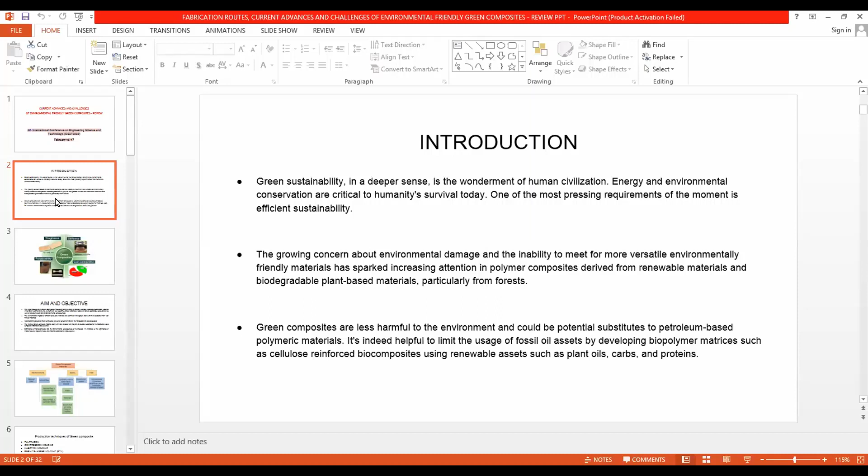To render them affordable, sustainable and eco-friendly, many studies have suggested developing biodegradable green composites utilizing renewable resources such as natural fibers, agro feedstocks and biodegradable polymers. As you can see on your screen, these are the wonderful properties: very good toughness, high stiffness, easy processability. It is even cost competitive when compared to traditionally used composite materials based on metal matrix composites.

So what is the aim and objective? I think this portion I have already covered. When you say green composites, this is how they are divided: reinforcement, matrix, and filler. Based on this classification, the reinforcement is classified into natural fiber and hybrid fiber, and we have natural fiber plus natural fiber, and natural fiber plus synthetic fiber.

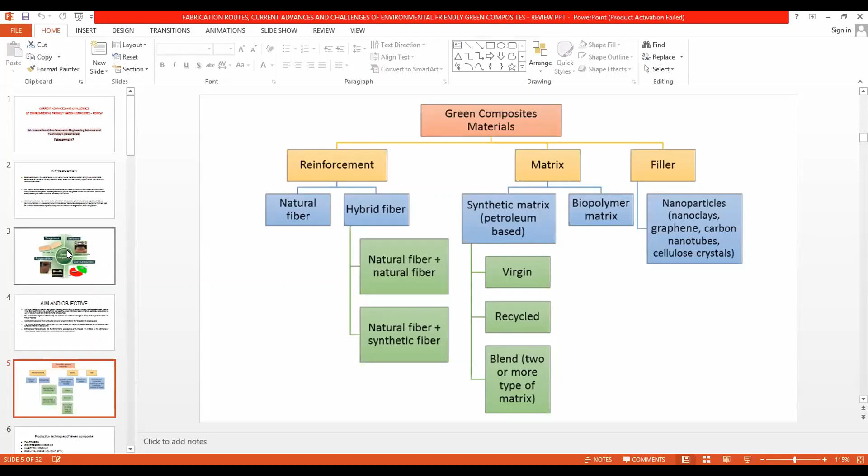In the case of the matrix, we have the synthetic matrix and the biopolymer matrix. Among the synthetic matrix or petroleum-based materials, you have virgin, recycled, and blended. Coming to the last one, the filler part, we have nanoparticles: nanoclays, graphene, carbon nanotubes, and cellulose crystals.

Coming to the various production techniques adopted for the manufacture of green composites, you have important techniques like pultrusion, compression molding, injection molding, resin transfer molding, extrusion, thermoforming, and filament winding.

In green composites manufacturing, green composites have indeed been designed to establish composites that are very environmentally beneficial. Most are either entirely biodegradable or moderately biodegradable materials. Recent advances in the production of entirely biodegradable green composites, such as starch and wood fiber composites, as well as soy protein-based composite materials with organic fibers, have shown tremendous qualities.

This is how the sustainable reinforcement fillers can be identified. You have flax, sisal, wood pulp. In the other portion, you have wheat, corn, miscanthus, which come under agro and forestry residues. In the case of traditional natural fibers, we have kenaf, flax, jute, sisal, ramie, cotton, bamboo, henequen, and wood.

Of course, industrial products are also widely used as reinforcement materials, like lignin, DDGS, biocarbon, and pomace. Pomace is actually a product of the oil that comes from the olive. I think most Middle East countries are much more familiar with pomace. This is another residue that comes out; it is an industrial co-product that can be used as a reinforcement.

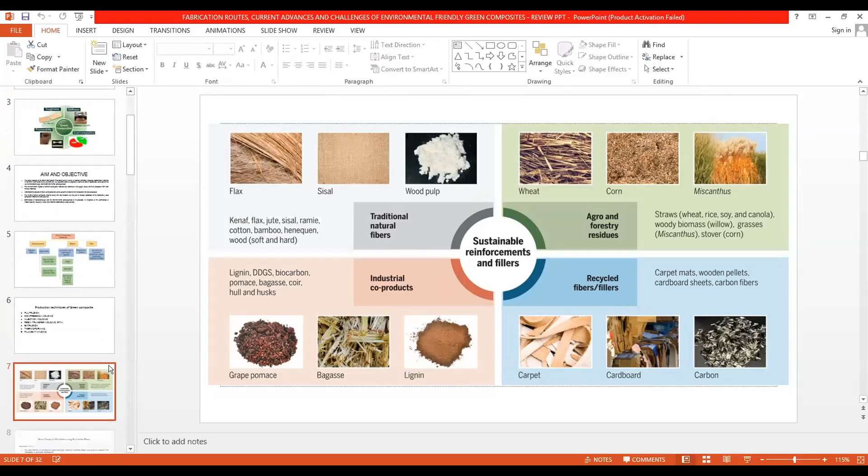In the other portion, you have recycled fibers like carpet, cardboard, and carbon, such as carpet mats, wooden pellets, cardboard sheets, and carbon fibers. These are all very common applications that you can see. So when it comes to the natural fibers, see what I'm trying to give.

What we have done in this particular review paper is we are trying to throw some light on the importance of green composites by introducing what are the different types of fibers that are used, and then we have moved to the other aspect of how green composite is going to replace the metal matrix composite genre, and not only that, how well the green composite is going to be an environmentally friendly material when compared to the other non-biodegradable materials.

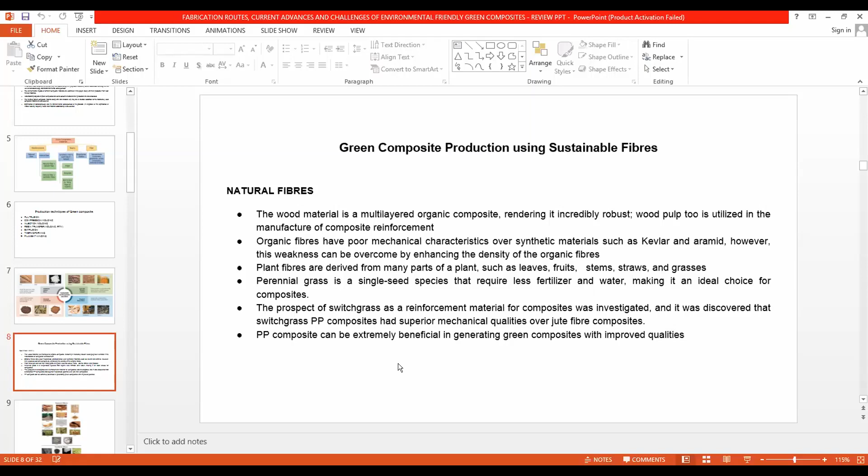So when it comes to natural fibers, of course, the wood material is a multi-layered organic composite, rendering it incredibly robust. Even the wood pulp is utilized in the manufacture of the composite reinforcement. The other common organic fibers, we know that although they have poor mechanical characteristics over synthetic materials such as Kevlar and aramid, this weakness can be overcome by enhancing the density of the organic fibers.

So when you say organic fibers, they have some tremendous advantages over the synthetic fibers, including recyclability. They have very good biocompatibility, environmental friendliness, superior insulating characteristics, and reduced machinery wear. And the natural fibers may be able to replace the synthetic fibers in the near future, provided their moisture absorbing characteristic is lowered, and the fiber lengths are extended to improve the mechanical characteristics.

When it comes to the plant fibers, we know even residues like the leaves, the fruits, stems, straws, and grasses are all studied in detail by numerous researchers. And natural fibers, on the other hand, have several drawbacks when compared to synthetic fibers, such as product variance owing to factors such as the plant age, the climatic and geographical growth circumstances, the cultivation techniques, and the cleansing technologies. So all these things we have to consider while manufacturing the green composites, right?

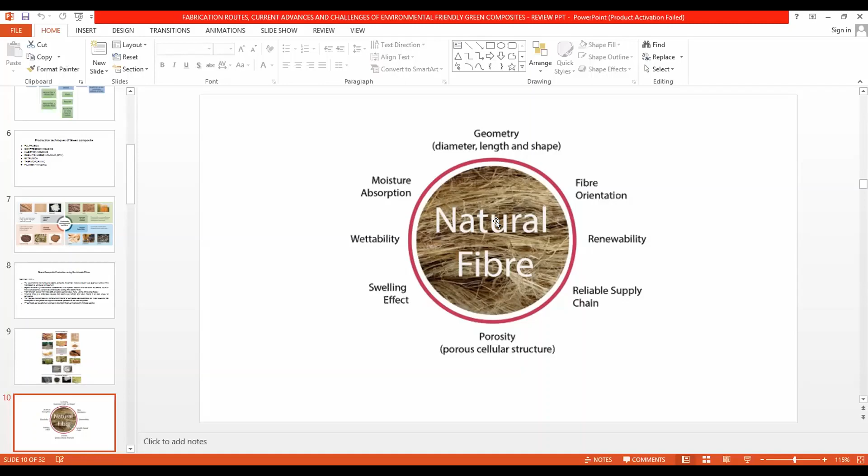Of course, these are some of the factors that must be considered before this natural fiber is used as a viable replacement for the synthetic fibers. So you have the moisture absorption, fiber orientation, renewability, reliable supply chain, the porosity, the swelling effect, even the wettability are some of the features that we have to look into. So this is the natural fiber.

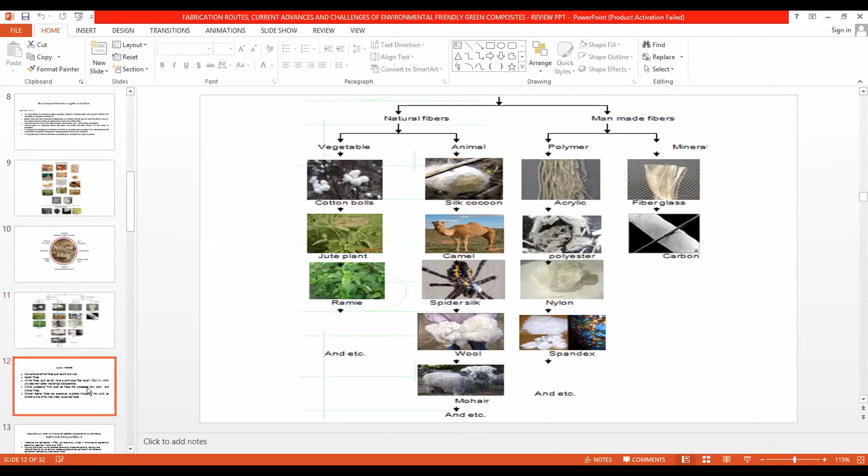Already we have covered the man-made fibers and the natural fibers: the cotton boll, jute plant, ramie. When it comes to the animal part, we have the silk cocoon, the camel, the spider silk, wool, and mohair. And coming to the man-made fibers, the polymer and mineral, you have fiberglass, carbon, acrylic, polyester, nylon, spandex. Okay, and these are the animal fibers which we have already covered. For example, chicken feather fibers are extensively available throughout the world, as chicken is one of the most widely consumed foods.

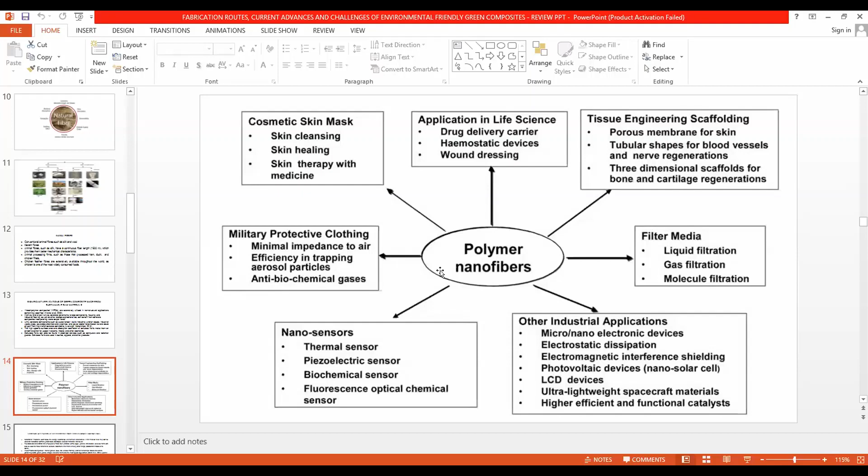Coming to the application part, that is something that we have to give some importance. Let me come to the applications, and I will come back to this. So these are some of the very important applications of polymer nanofibers. For example, they're used for cosmetic skin masks, applications in life science, drug delivery carriers, hemostatic devices, wound dressing. Of course, tissue engineering and scaffolding, porous membranes for skin, tubular shapes for blood vessels, and nerve regeneration. And other industrial applications such as micro/nano electronic devices and electrostatic dissipation. So all these are some very important applications of the polymer nanofibers.

So coming to the significant applications of the green composite made from sustainable raw materials, that is, you have the nanofibrils, in medicine, cosmetics, energy, electronics, environment, and textiles. In the medical field, they can be used as medication carriers, for prostheses, bandages, surgical materials, and so on. So these are some of the facts, because I've been given a very short time, although in the review paper we have covered many important aspects related to the significant applications of green composites.

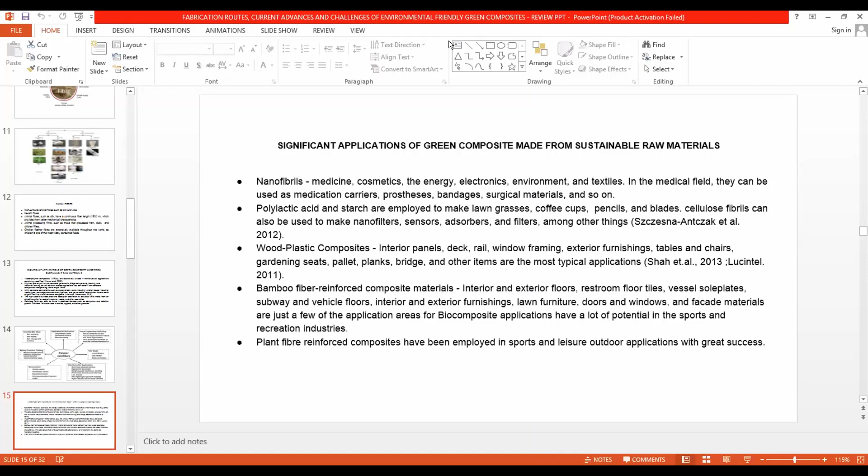The other applications are the plant fiber-based reinforced composites, like boat hulls, canoes, skateboards, surfboards, bicycle frames, sports rackets, dolls, music equipment. These are some of the important applications of the green composite made from sustainable raw materials. So what about the recyclable ones? Recyclable material, indigenous resources, construction and materials reclamation are also included in green composites, in architectural as well as structural applications. And green composite bars have been very commonly used in construction to substitute conventional steel bars, resulting in structures that are significantly earthquake resistant.

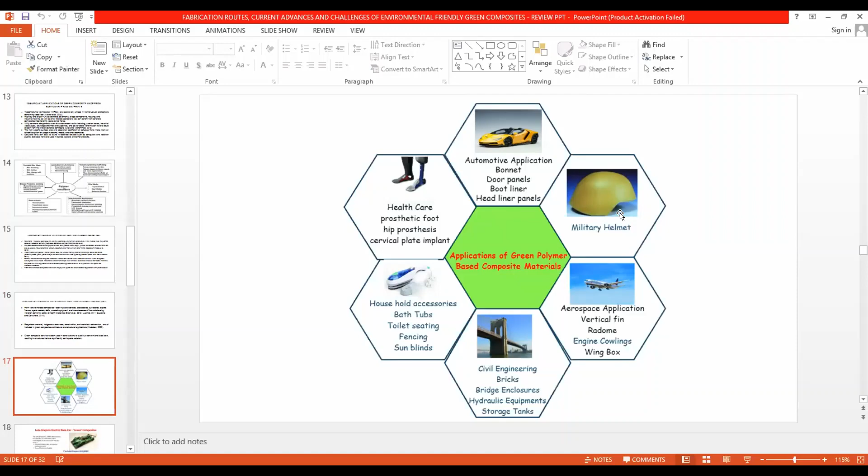These are some of the most common applications, which I think we are already aware of. The most common one is healthcare: the prosthetic foot, hip prosthesis, and cervical plate implant are very significant applications of green polymer-based composite materials. And the automotive applications, the bonnet, door panels, boot liner, headliner panels, and even a military helmet are other significant applications of green polymer-based composite materials.

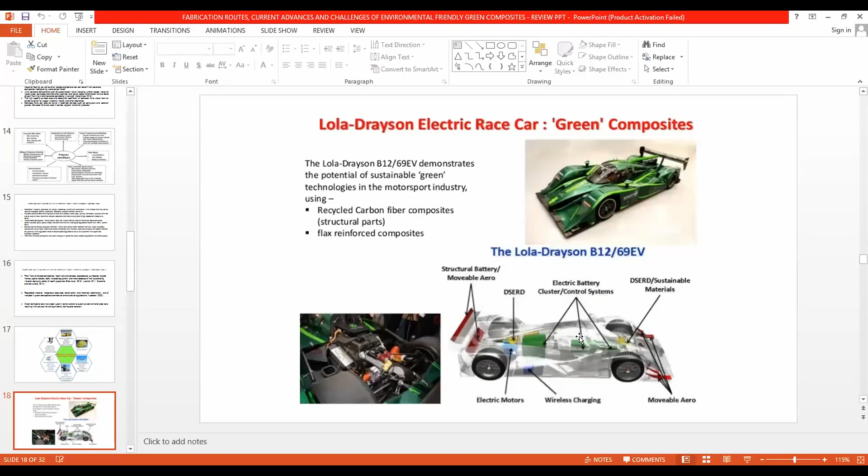And this also, I think most of us are already aware, the Lola-Drayson electric race car is also made of green composite. In other words, recycled carbon fiber composites are used for the structural parts. Even flax reinforced composites are used to manufacture this particular sports car. Even the Lola-Drayson, the B12/69EV, is another significant area where green composites are used. So these are some of the other applications you can see on your screen.

So what about the concerns in the production of green composites? So far, we have seen the advantages, but there are some concerns that we have to face. The very first thing is the heat treatment issue. Heat treatment is no doubt a major stumbling block in the way of the smooth manufacturing of green composite materials, because the fundamental issue in green composite manufacture is that they must survive extreme heat while removing the odor produced by natural fibers such as kenaf, hemp and jute.

The natural fiber-based composites are quite expensive, which is not acceptable to the massive car sectors. Another drawback is the insufficient knowledge about the functioning of sustainable and green composites, owing to an enormous diversity of ingredients, which is the greatest hurdle to surmount in this industry. One more thing is, to achieve good quality composites, the first essential task is to choose the correct manufacturing circumstances and factors, as well as the precise choice of composite ingredients and overall material qualities.

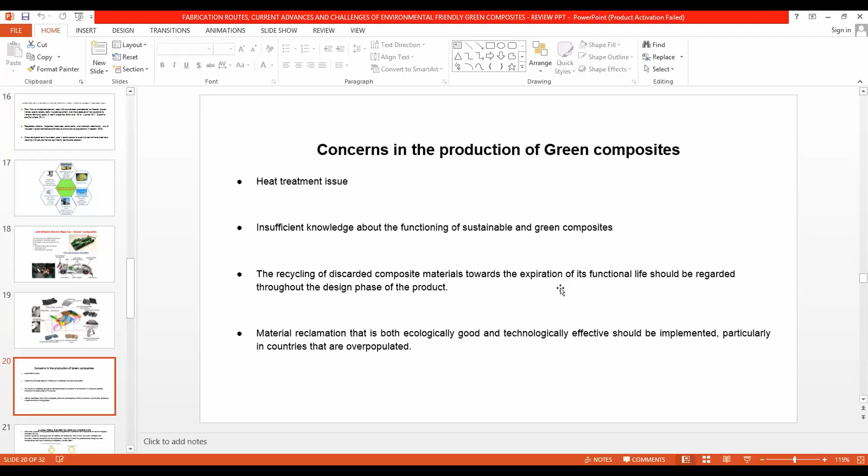And plastics are somewhat inevitable materials in many aspects of modern civilization, including medical services, distribution of food, construction materials, automobiles, mobility, and even the wrapping for household devices. So material reclamation is another factor that has to be considered. That which is both ecologically good and technically effective should be implemented, particularly in overpopulated countries like India, China and Indonesia, where population is a major thing.

And one more thing I want to cover is, sir, can I cover for another 3-4 minutes, sir? Can I talk for another 3 minutes?

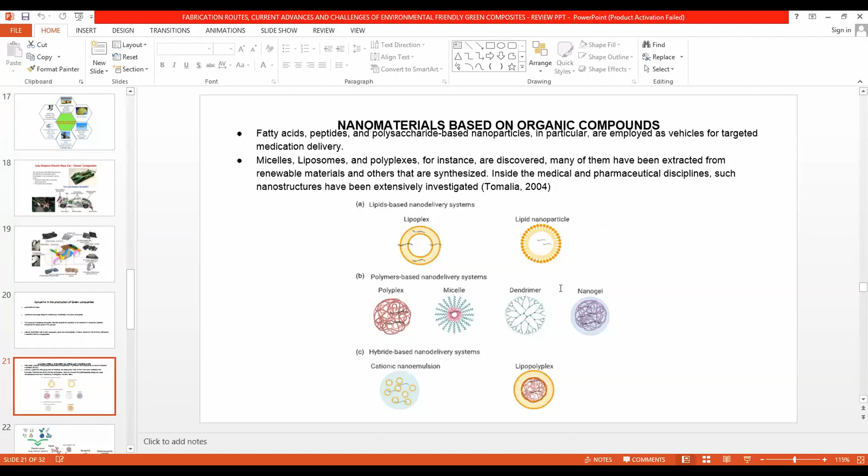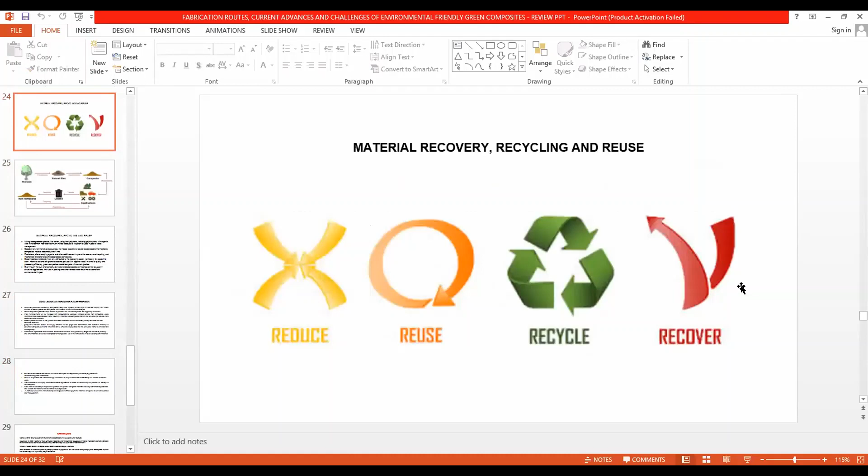You can end. I can end, or can I proceed, sir? Okay, sir. So some of the slides I thought of covering, but because of the time limitation, okay, sir.

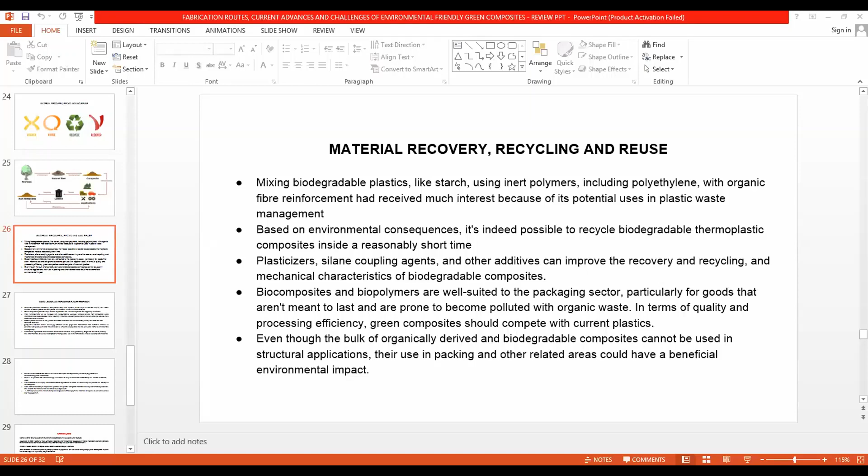And there is also one more presentation I would like to do, on the effect of fabrication parameters on the mechanical, wear and corrosion behavior of hybrid metal matrix composites. Recycling of MMC, a review. Can I make the second presentation, sir?

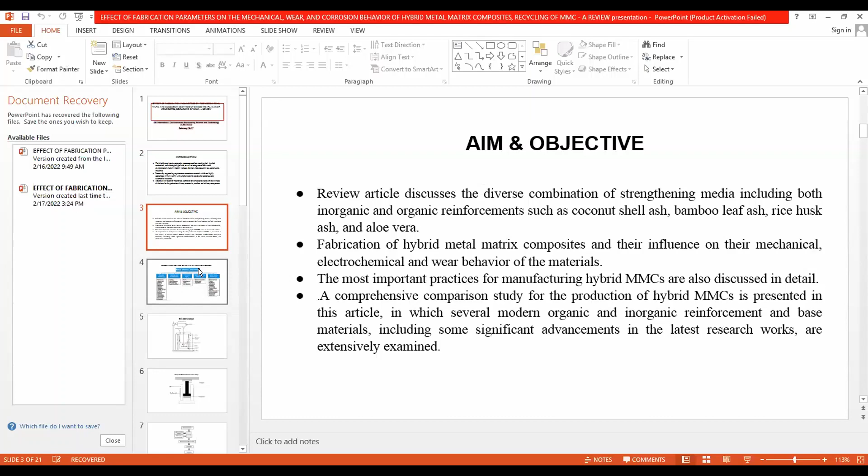The other fabrication methods that are carried out will also be covered. A comprehensive comparison study for production of MMCs is also present in this article, in which several modern organic and inorganic reinforcements and base materials, including significant advancements in the latest research works, are extensively examined. So this is the very basic outline of the classification of the various production methods followed to produce metal matrix composites.

Of course, the most common is powder metallurgy: mechanical alloying, sintering, mixing, blending of powder and hot pressing, spark plasma sintering, deformation processing of powder compacts. You have melting and solidification, thermal spray like plasma spray, cold spraying, electrochemical deposition, and the latest novel techniques like molecular level mixing, sputtering, sandwich processing, vapor deposition, mixing as paste, and nanoscale dispersion. These are some of the most commonly adopted manufacturing routes.

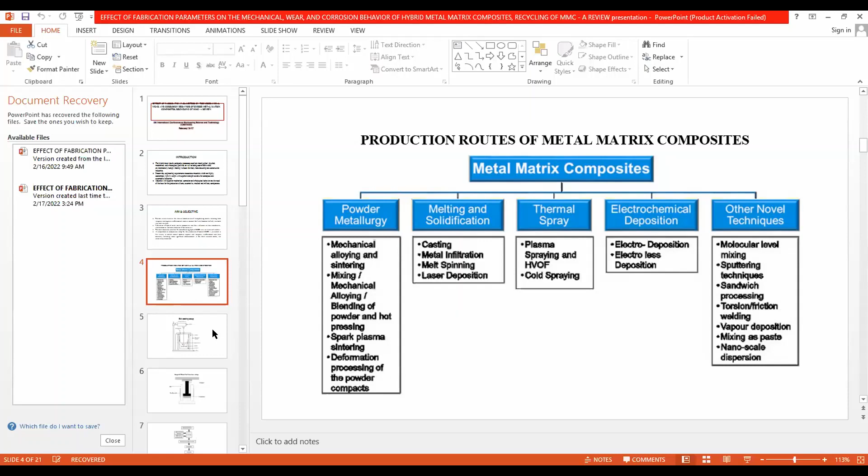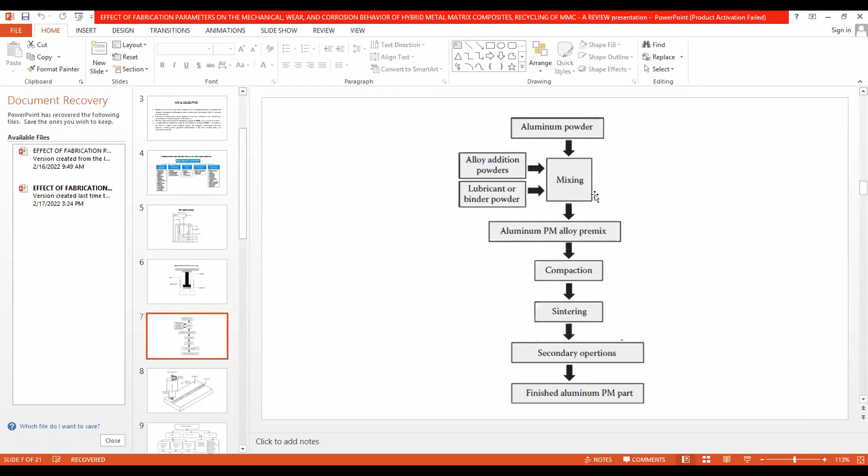Another very important thing is the type of reinforcement used. You have alumina, silicon carbide, boron carbide, titanium carbide, tantalum carbide. In other words, combinations of oxides, borides, and carbides are generally used as synthetic reinforcements to improve the strength and other properties like tribological and corrosion properties of metal matrix composites. The most commonly used synthetic reinforcements are magnesium oxide, zirconium silicate, zirconium oxide, titanium boride, silicon carbide, and boron carbide.

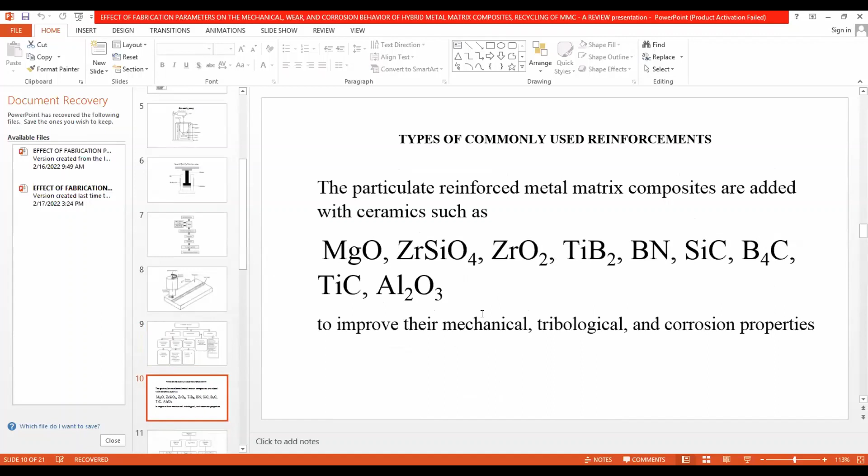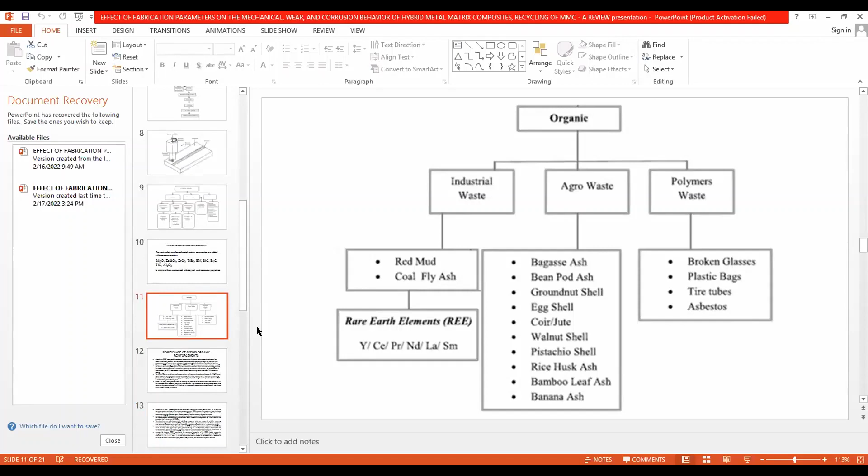So what about organic reinforcements? How are they classified? Industrial waste, agro waste, and polymer waste. Under industrial waste, the most common are red mud and coal fly ash. Many research works have been carried out reinforcing the metal matrix with organic reinforcements: how the mechanical, corrosion, and wear behavior are affected. It was found really satisfactory that organic reinforcement could be a very good replacement for synthetic reinforcements. These are some of the research works carried out.

For example, Al-Sadi et al. investigated the mechanical characteristics of polyester matrix composite with microscale natural pistachio shell. Pistachio means the commonly used pista. That shell material is used for enhancing properties like flexural strength, tensile strength, and impact strength. And even hybrid egg shells are also used.

Even the BLA is another important reinforcement that has been used along with alumina, and studies have revealed that the tensile strength, yield strength, and specific strength have also been improved because of the addition of the organic reinforcements. We have many research works; only a few I have shown in my presentation.

So you have the rice husk ash. Even rice husks have been included in the 6061 aluminum alloy, which acted as a nucleation source, resulting in finer aluminum matrix grains, and even wear resistance, in addition to increased mechanical characteristics, has been achieved.

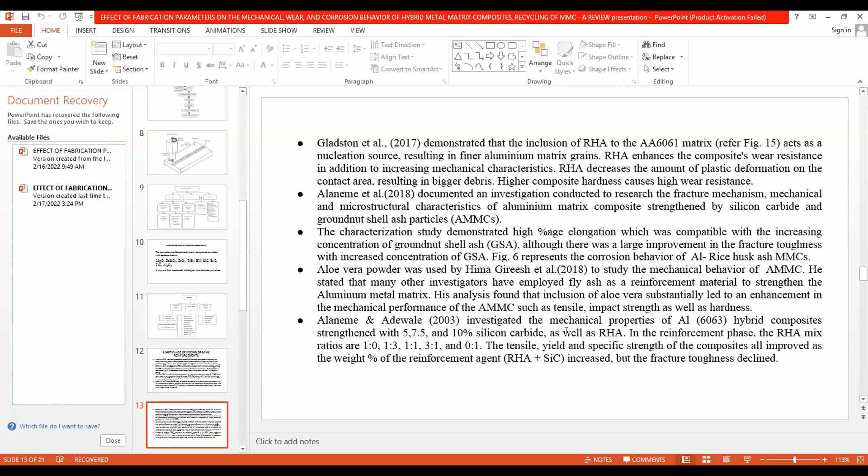Even aloe vera powder has been used to study the mechanical behavior of aluminum metal matrix composites by Hima Gireesh. And again, Alaneme and Adewale in 2003 investigated the mechanical properties of 6063 hybrid composites strengthened with 5, 7.5 and 10% of silicon carbide. Significant improvements in tensile, yield, and specific strengths have been observed.

So what about the recycling aspect? Recycling is a very important topic because the ever increasing number of agricultural and industrial waste products raises environmental pollution problems; it poses the risk of poisoning in people and animals and also plant contamination. Furthermore, irrespective of area, global consumption levels have already had a substantial influence on the environment.

So recycling is a process of removing goods from the trash stream so that they could be utilized as raw materials in the development of innovative products. The result of recycling can be two: one, the recyclables could be used directly, or the waste products can be employed as raw materials for new items.

So these are some of the research works. P.S. Ling and M. Gupta investigated the possibility of recycling a silicon carbide particle reinforced aluminum composite, and it was found that there has been a significant improvement in the ultimate tensile strength. Even the ductility and other mechanical properties were found to be significantly increased.

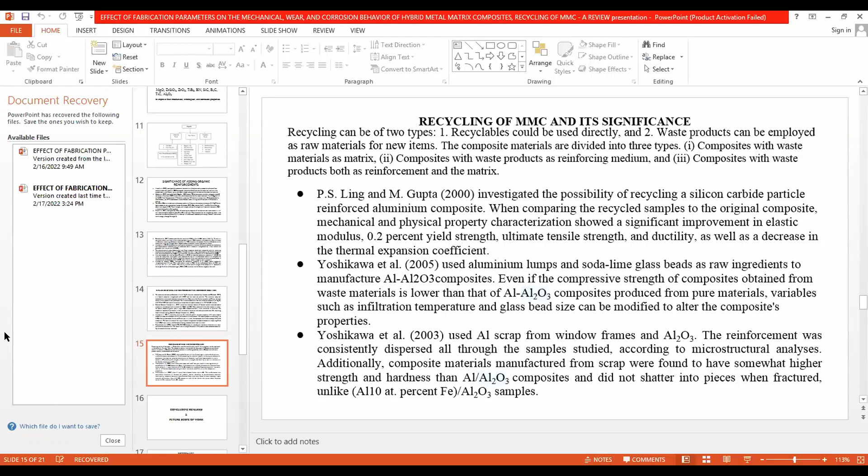And what about the future scope? Let me add a few words: the present review paper suggests that hybrid metal matrix composites based on nano and biomaterials are evolving sectors that can be effectively used in automobiles, maritime, aviation, and wind electricity production.

And hybrid thermoplastic and hybrid structural composite materials can also be used in civil engineering, biomedical engineering, as well as other affiliate industries, despite significant work in this domain. So more such research can be carried out, and hybrid metal matrix composites can still be implemented in areas where we can focus on nano-based hybrid metal matrix composites.

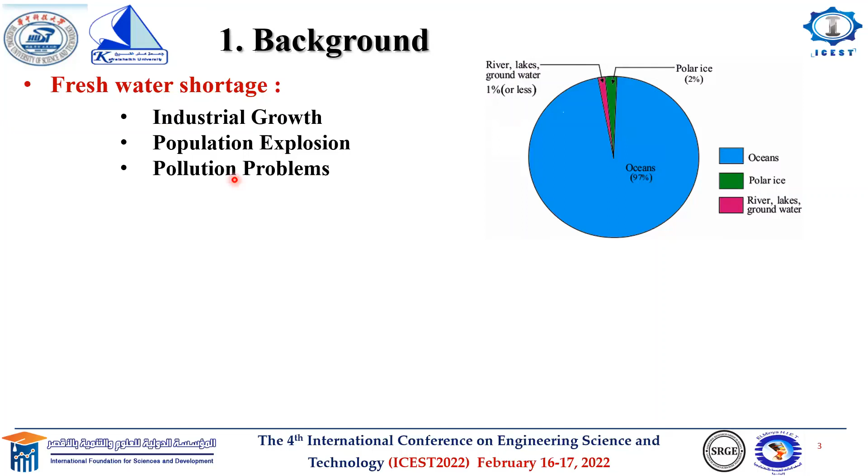First is the background. I think all of us are aware of the problem of freshwater shortage, as only 1% of the water is drinkable. This problem is increasing with the industrial growth, population explosion, and pollution problems. But the Earth is very lucky because of the availability of solar energy. The solar energy is available approximately on all the Earth's surface, with daily energy about 7.4 kilowatt per meter square per hour.

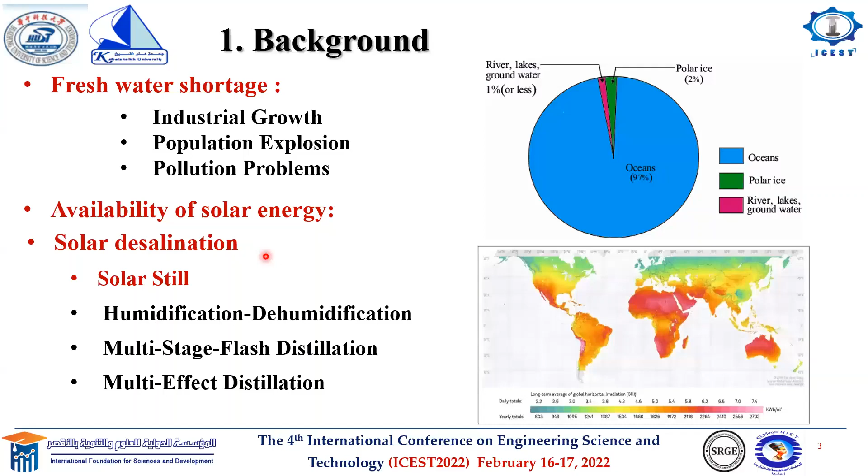This is a great opportunity for solar desalination systems, especially the solar still. A solar still is a simple device that consists of a basin which contains saline water that evaporates under the solar radiation. Then it's transferred to the inner surface of the glass cover to be condensed and is collected as fresh water. The solar still has many advantages such as simplicity, easy operation, and low cost, but it has disadvantages of low productivity and low efficiency. So many efforts have been conducted to enhance the productivity and efficiency.

To enhance the productivity and efficiency, we should know what are the parameters affecting the performance of the solar still. According to a machine learning work, it was proved that the thermal design is the most important parameter that affects the performance of the solar still. So approximately all the efforts conducted to enhance the solar still performance were conducted to enhance the thermal design.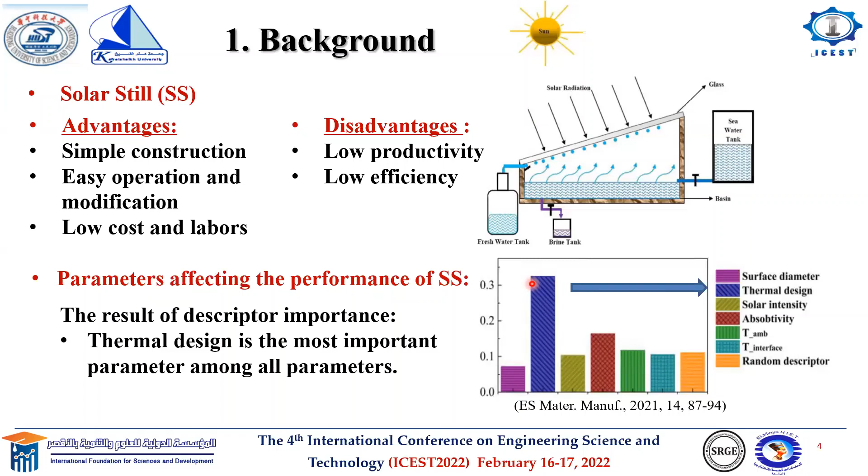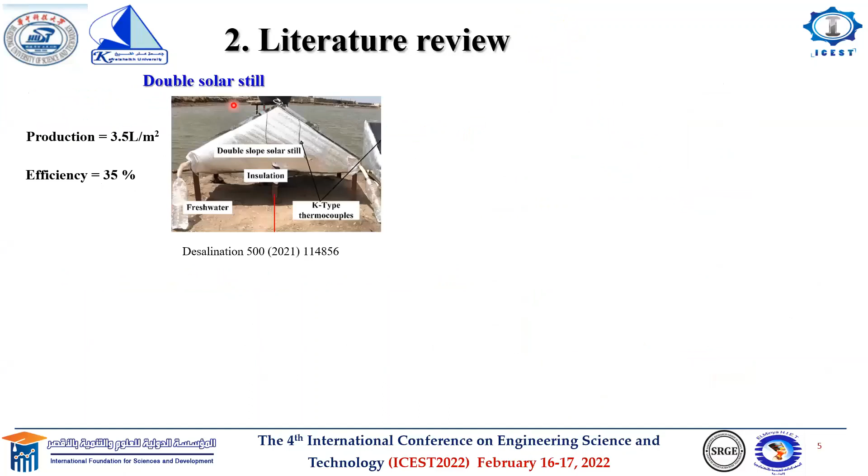Now I will give a literature review. There are many designs of solar still. This design, which was presented as single slope, was updated to double slope solar still, pyramid solar still, hemispherical solar still, and tubular solar still. We can see from these numbers that enhancing the thermal design can enhance the productivity and the efficiency, but it's still low. So further enhancement can be conducted, such as integrating heat localization material.

The aim of heat localization material is to localize or concentrate the heat on the surface of evaporation without the need to heat bulk water. In this work, a plastic ball was used as insulation. It was covered with wick to have good capillarity to raise the water to the evaporation surface. The productivity and efficiency were enhanced by 60% and 32% respectively.

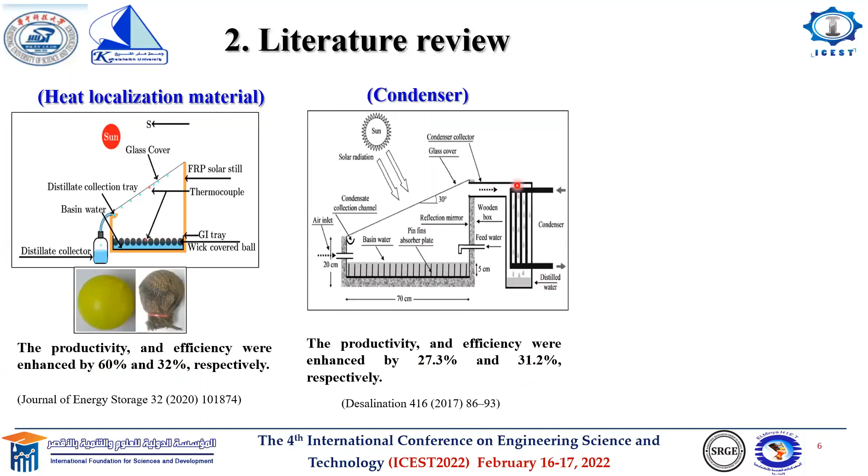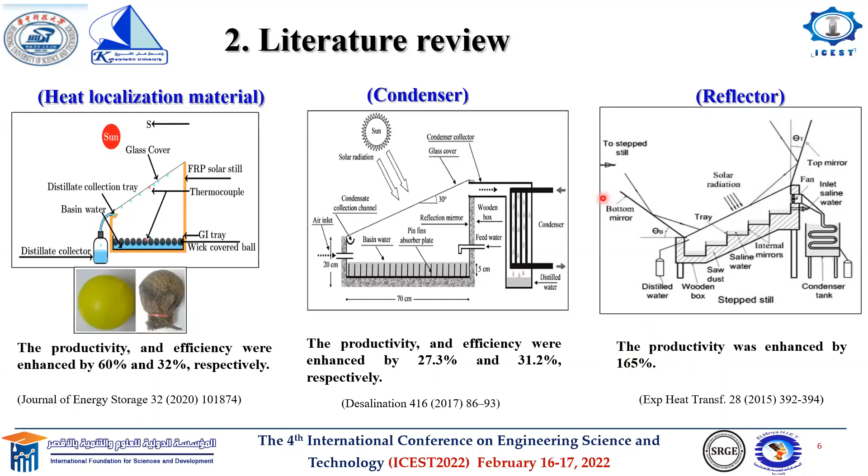Also, the performance can be enhanced using a condenser. The condenser aims to increase the condensation rate of the vapor. In this, the condenser can enhance the productivity and efficiency by about 27.3% and 31.2% respectively. Besides, reflectors can be added to concentrate the solar radiation on the evaporation surface to enhance the productivity. In this work, the productivity was enhanced by more than 165%.

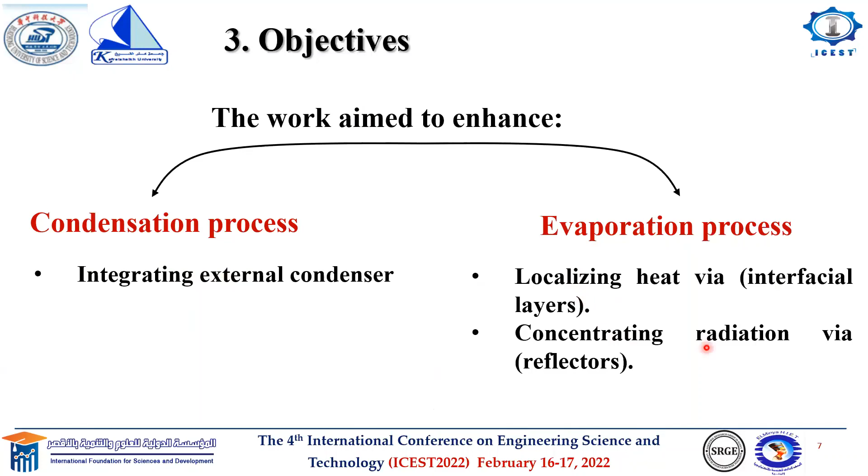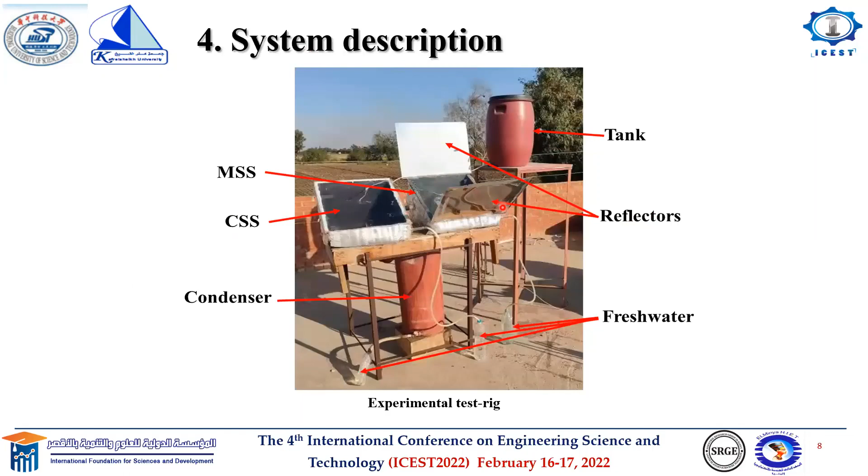The objectives of the current work are to enhance the condensation process using an integrated external condenser, enhance the evaporation process using heat localization material or interfacial layers, and concentrate the radiation via reflectors. Our system consisted of a conventional solar still for comparison and the modified solar still. The modified solar still was integrated with reflectors, an external condenser, and heat localization material. The whole system was provided with saline water through a tank and connected with pipes, fittings, valves, and others.

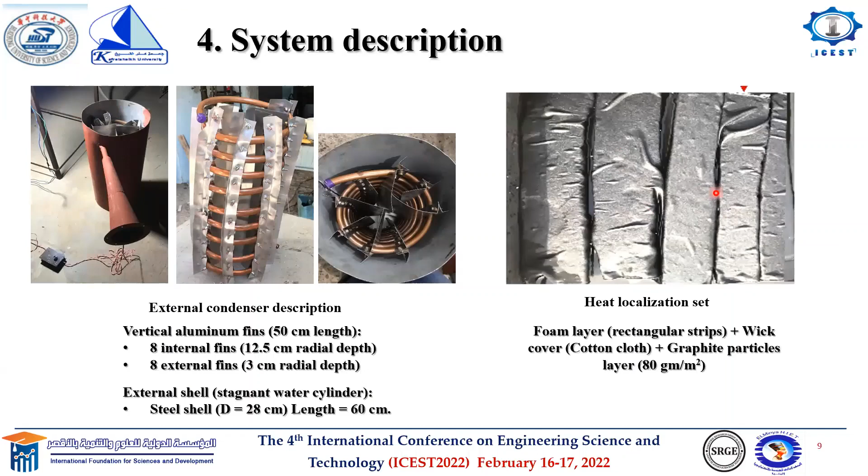The condenser used was a passive condenser that consisted of a helical coil finned with radial fins, about 8 radial fins. The water was stagnant in an external shell. The heat localization material was a foam layer, foam strips, covered with cloth wick material with high capillarity, and we also used graphite particles dispersed on the surface of the heat localization material.

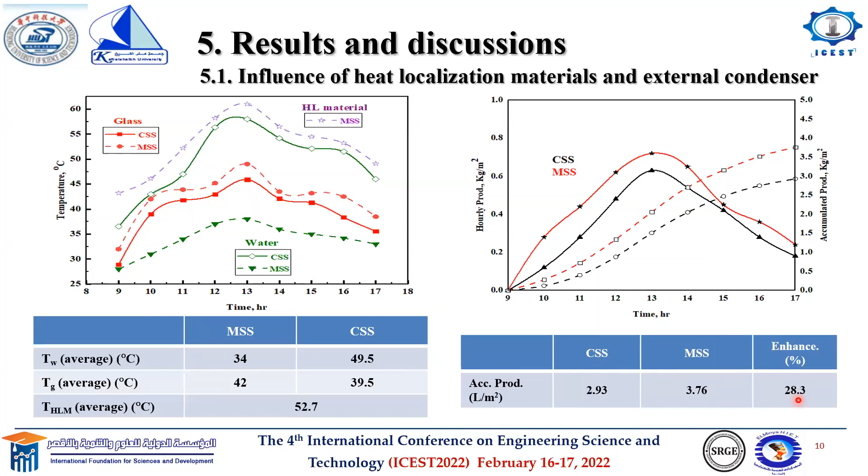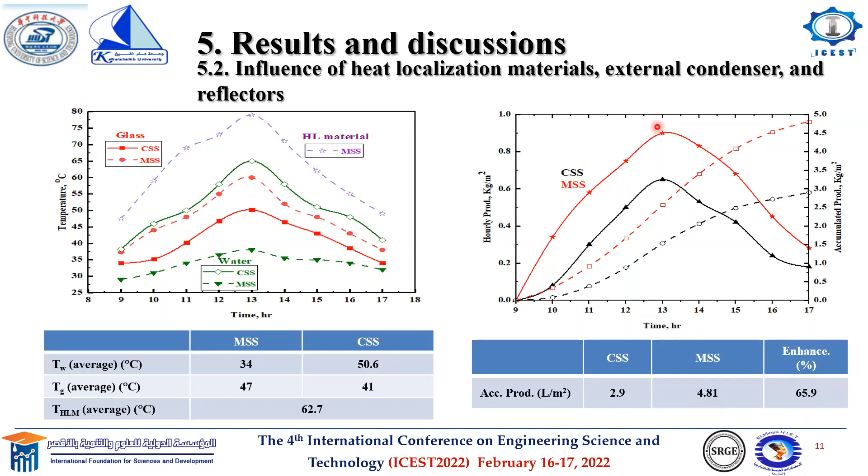The productivity in the conventional solar still was about 2.9, where it reached 4.81. This means that it was enhanced by 66%. Also, we conducted a thermoeconomic performance assessment in terms of the energy efficiency, which is a function of hourly productivity, latent heat, solar radiation, and the area and work of the fan used for the condenser.

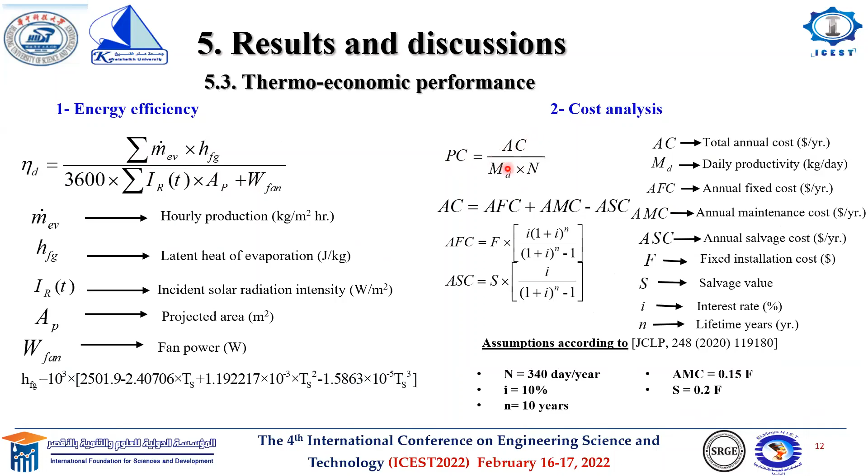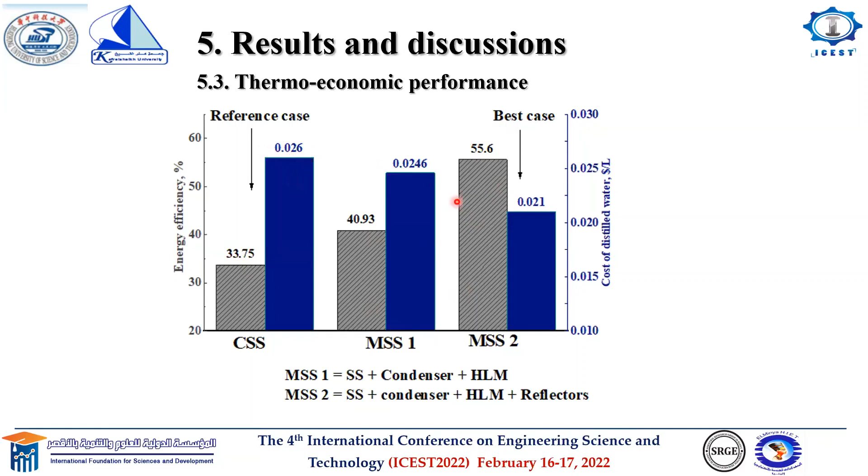The economic analysis was conducted by calculating the cost of the produced water, which is a function of the annual cost, daily productivity, number of days, interest rate, and the number of years. The thermoeconomic performance showed that the conventional solar still efficiency was about 34, where it was enhanced to 41 and 56 in case of the modified solar still with condenser and heat localization, and with condenser, heat localization, and reflectors. Whereas the cost was reduced by addition of the proposed modifications.

To conclude, the solar still performance was enhanced via integrating external condenser, heat localization material, and external reflectors. The major results can be concluded as follows. Using a condenser and heat localization material, which is known as modified solar still number 1, the productivity and the efficiency were enhanced by 28.3 and 21.3 respectively, and the freshwater cost was saved by about 5.4%.

Using condenser, heat localization material, and the reflectors, the productivity and efficiency were enhanced by about 66 and 65 respectively, and the freshwater cost was saved by about 20%.

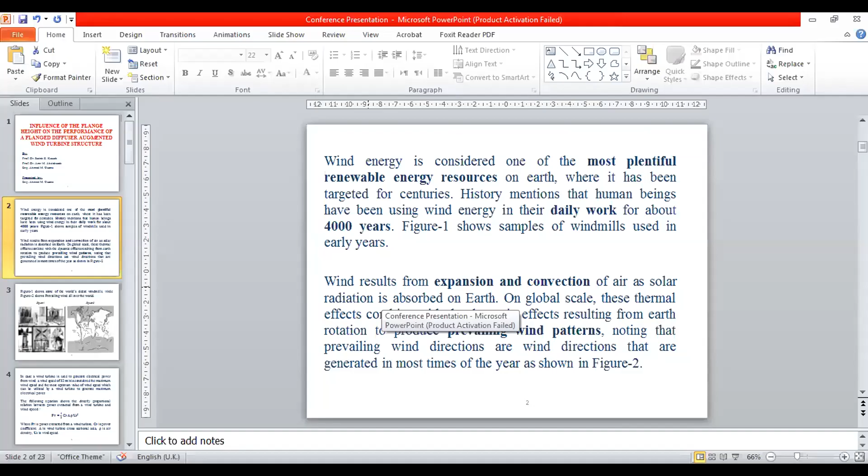We are going to present now the paper on the influence of the flange height on the diffuser augmented wind turbine structure. This is presented by me, Engineer Ahmed Usama, and was supervised by Dr. Sadiq Kassab and Dr. Amr Abdelrazak.

First of all, a small introduction regarding wind energy. Wind energy is considered one of the most plentiful renewable resources, and it has been used for more than 4,000 years in daily works. It was named as windmills.

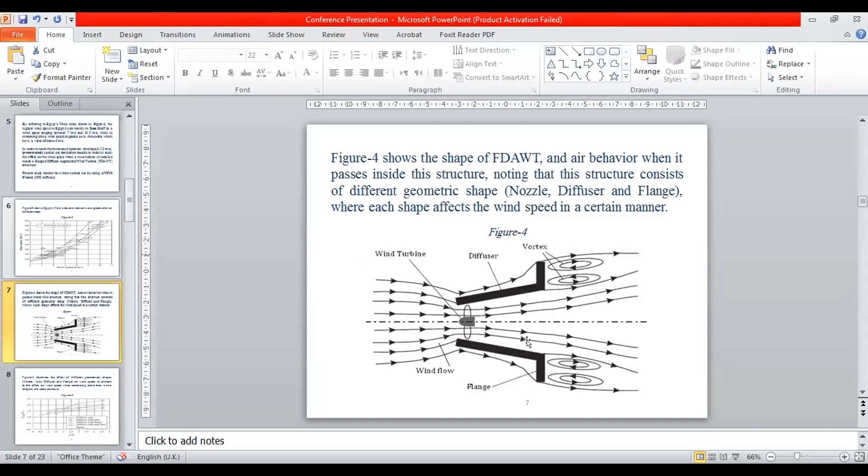Figure number 4 shows a diffuser, the structure by which we shall reach, or approach, the required optimum velocity, which is 12 meters per second. This is the flanged diffuser augmented wind turbine, where this figure shows the pattern of the wind passing through it. It passes in a uniform phase at the beginning, then there are some eddy currents behind the flange, which act as a suction area in order to increase the velocity inside the structure.

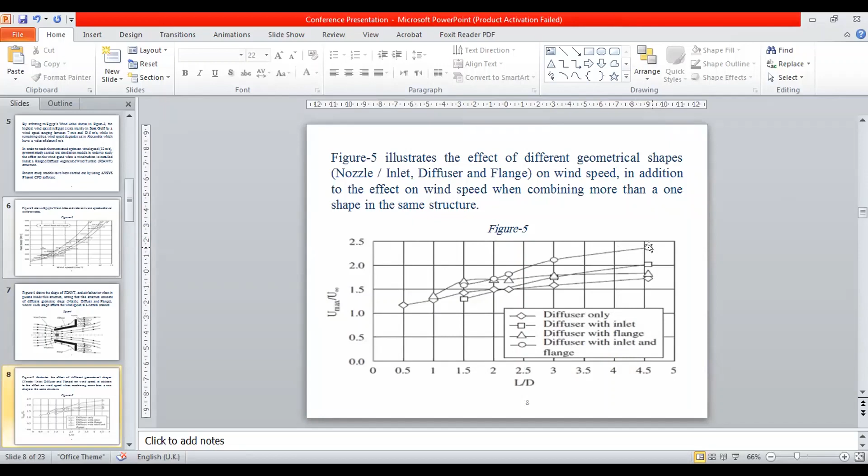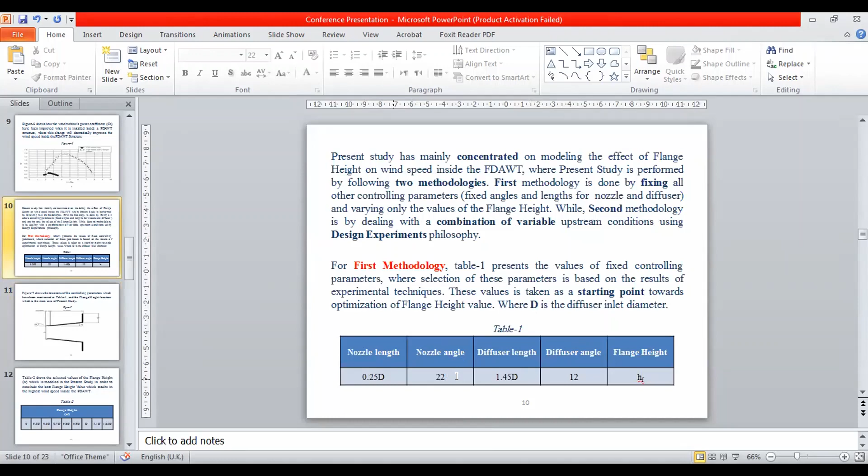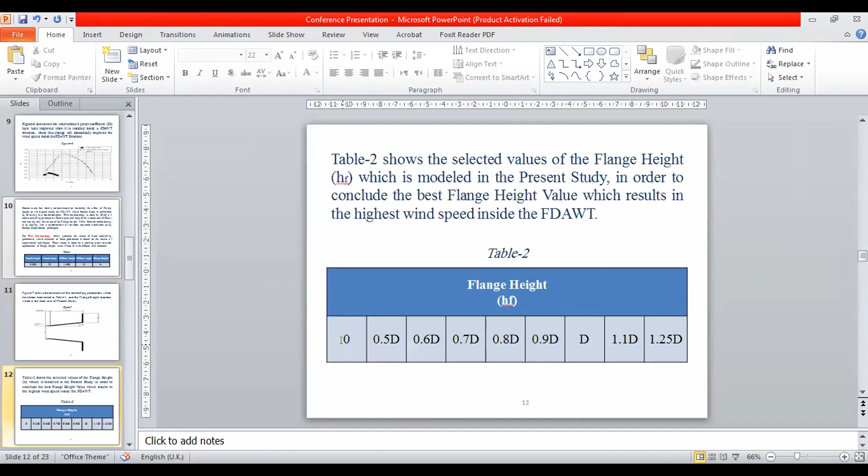So our first methodology was to fix all 4 parameters and only change the flange height in order to conclude the best value of the flange height. These values were concluded from other experiments: the nozzle length was 0.25D, nozzle angle 22, diffuser length 1.45D, diffuser angle 12. Then we changed the flange length, from 0 to 1.25D, in order to conclude the best length. And these were the outcomes using ANSYS Fluent software.

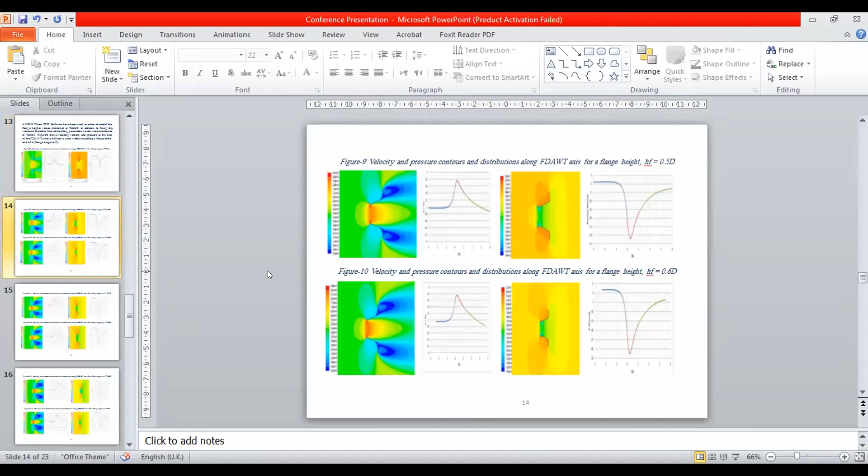Okay. This first figure was without a flange, with HF equal to 0. The second one is 0.5D, 0.6D. These are the velocity contours, velocity curve, pressure contours, and pressure curves. This for 0.5D, this for 0.6D, 0.7D, 0.8D, 0.9D, and D.

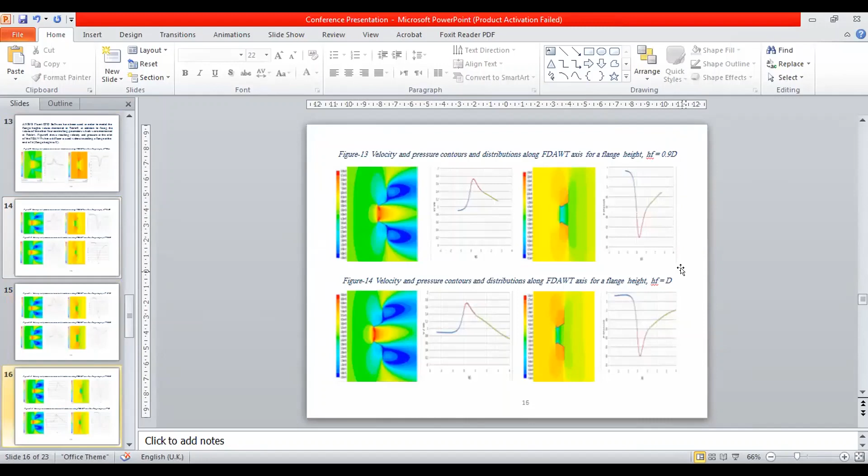This for 1.1, 1.25. So after calculating these figures and this shape through ANSYS software, we concluded that the flange height from 0 to less than 0.5D is not recommended, as the solution did not converge, where the optimum and the highest wind speed was at a value of D equals 0.5, which gives us a velocity ratio of 1.76. And the lowest one was at D equals 1.25. This was the highest pressure, highest velocities at the throat of the structure, whereas you can see that the highest one is at 0.5D.

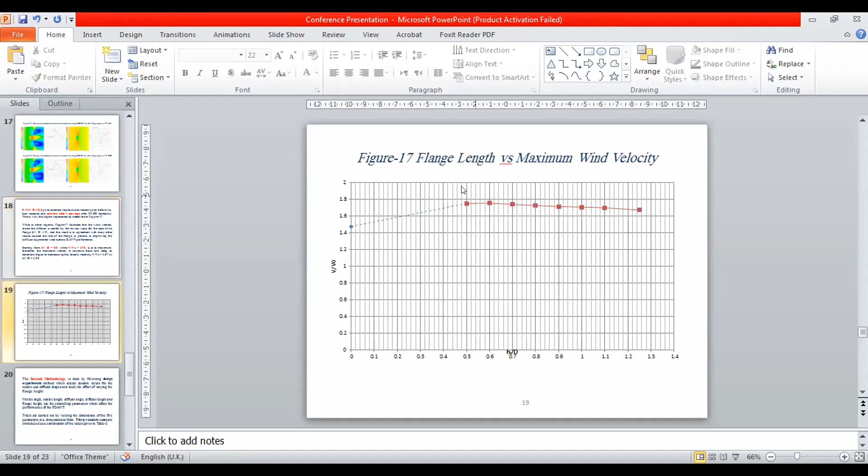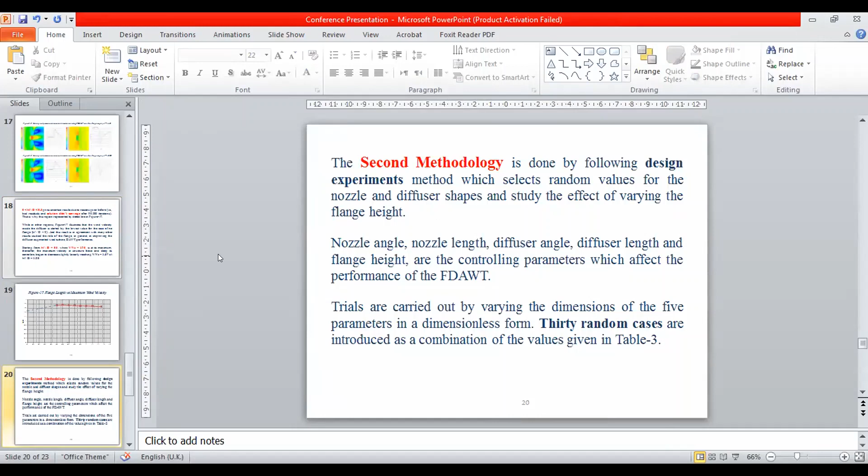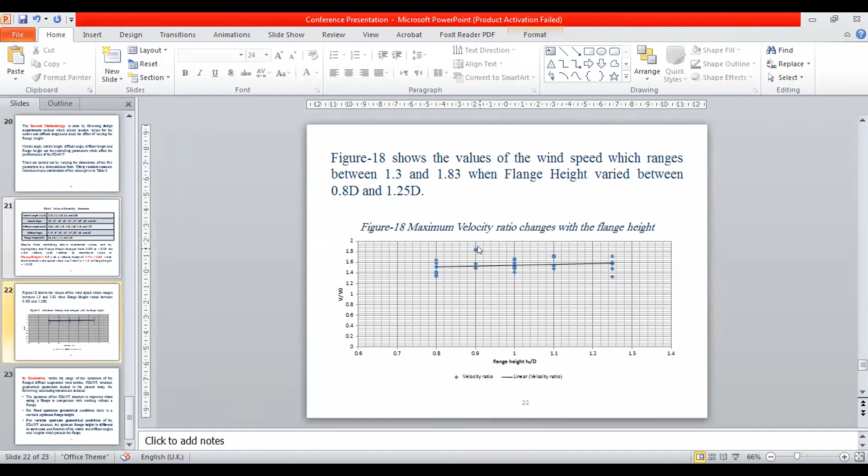After carrying out these 30 models, we concluded that the highest wind speed was generated at a flange height of 0.9D, with a ratio between inlet velocity and the velocity inside the throat of the diffuser at a factor of 1.83. And the lowest one was at 1.25D. This was the graph showing all the trials in blue dots, where it is clear that at 0.9D it is the highest velocity with a factor of 1.83.

In conclusion, this paper shows the high effect of using a flange at the diffuser structure, which increases the velocity in a high manner inside this structure. In addition to that, it shows the difference between the two methodologies, where when we fixed the other parameters, it gave us the flange height of 0.5D, while when we used the design of experiments method, it gave us the most optimum value at 0.9D.

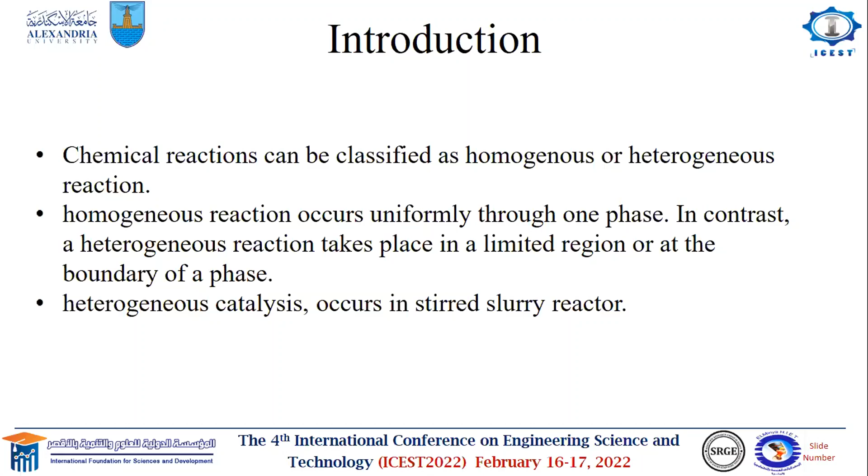A stirred slurry reactor has a lot of advantages. However, the disadvantages are the catalyst for a slurry reactor becomes ineffective due to continuous circulation. Scaling up of the reactor poses several problems. The most serious shortcoming is that separation of the catalyst from the product is a time-consuming process and needs a high cost. The aim of the present work is to increase both the rate of mass and heat transfer in a square stirred reactor by increasing the surface area. This can be done by fitting the inner side wall of the tank with V-corrugated sheets, which act as a turbulence promoter.

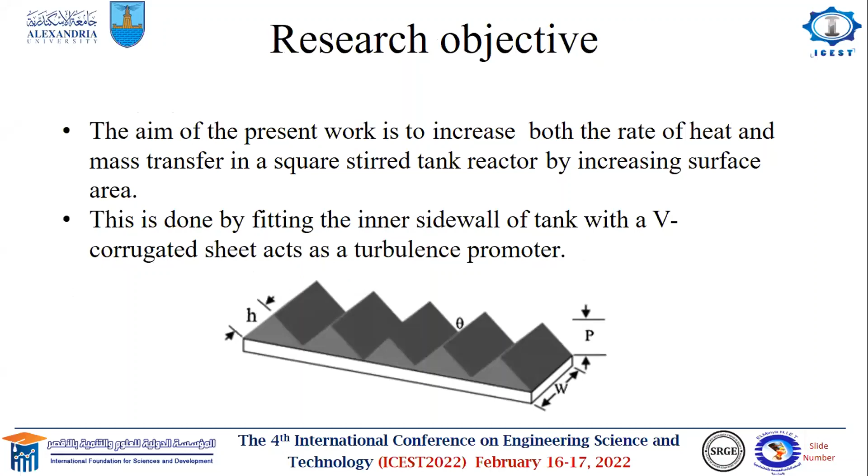Experimental procedure. This research has been done experimentally. On this slide, I will go briefly through the components of this rig in the following.

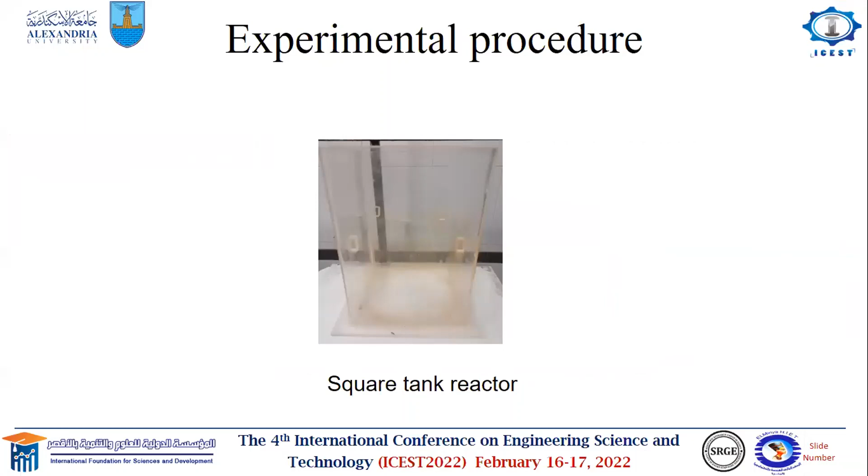The main component is the squared stirred reactor with dimensions 15 by 15 by 25 cm, which is made of plexiglass. Using two different impellers, the first one is the axial flow turbine and the second one is the radial flow turbine. I used 5 cassettes, 1 smooth surface and 4 corrugated. All cassettes are made of copper plated with nickel with dimensions 15 by 15 cm.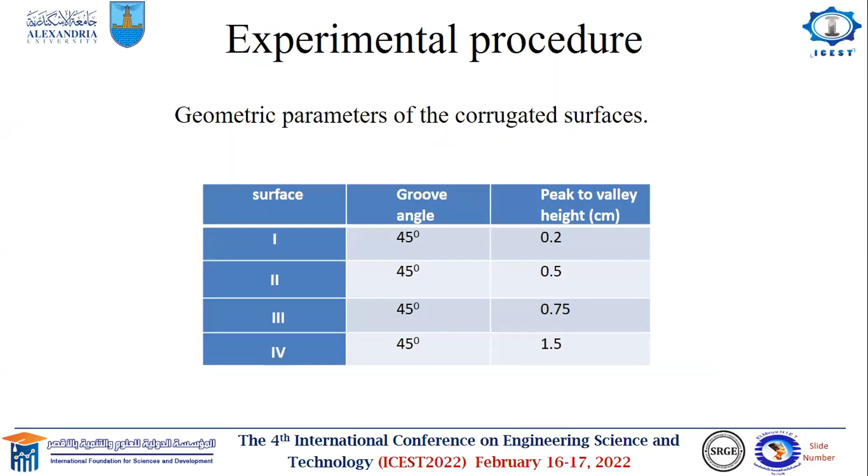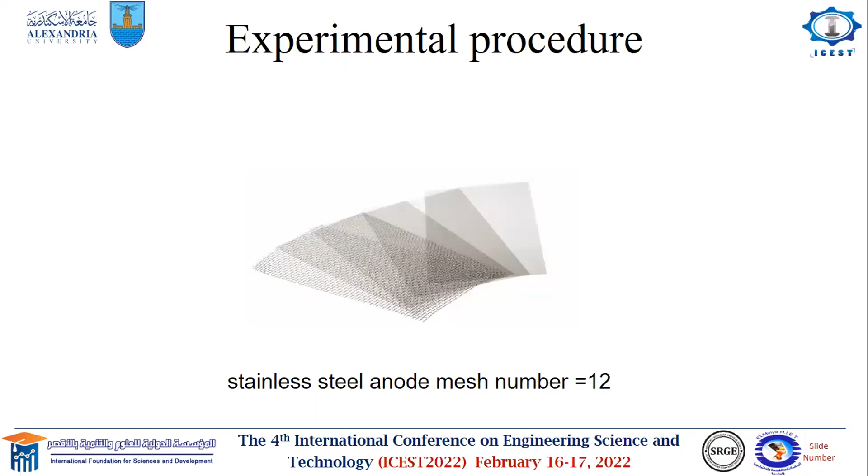I kept the groove angle constant and used 4 different peak to valley heights, which are 0.2, 0.5, 0.75 and 1.5 cm. A multi-sheet of stainless steel with a mesh number 12 is used as anode with dimensions 15 by 15 cm. Also a 30 volt DC power supply is used. 2 avometers are used, one as an ammeter and the other as a voltmeter.

The steps of the experiment are as follows. First, I prepare 3.4 liters of the first solution containing 0.1 molar potassium ferrocyanide and 0.01 molar potassium ferricyanide in a large excess of sodium hydroxide, whose concentration varies from 1 molar to 3 molar. Temperature was maintained at 25 degrees Celsius by inserting the cell in a water bath fitted with a thermostat. Physical properties of the solution are obtained from previous studies to calculate the Schmidt number.

The rate of mass transfer was obtained using an electrochemical technique in which the limiting current of the reduction of ferricyanide at the cathode surface was obtained from the polarization curve constructed by a stepwise increase of the current and measuring the corresponding voltage until the plateau of the limiting current is reached.

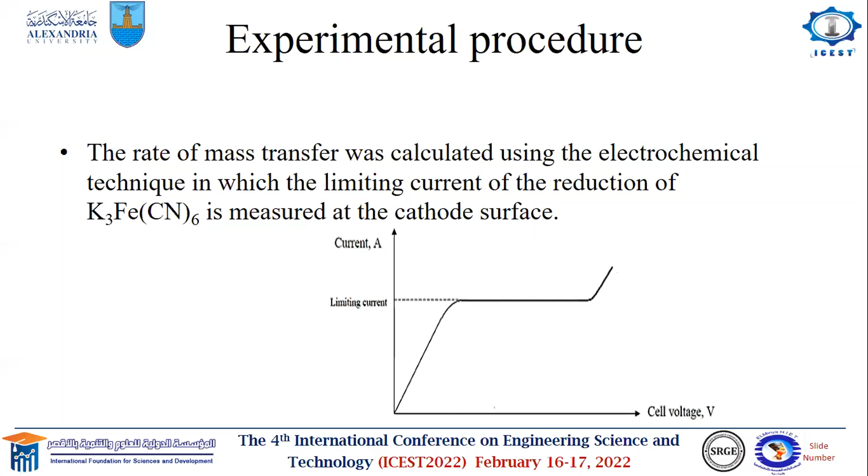Mass transfer coefficient is calculated from the limiting current equation as follows. IL is the limiting current, Z is the number of electrons involved in the reaction, C the concentration of ferricyanide ion, A is the surface area of the cathode, and finally K is the mass transfer coefficient.

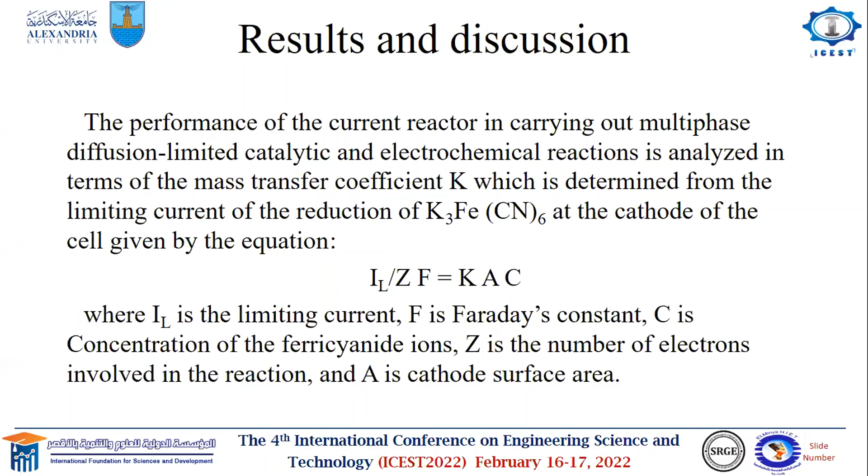Mass transfer correlations are obtained using some dimensionless groups as follows: Reynolds, Schmidt, and Sherwood, where Rho is the density of the solution, N is the RPM of the impeller, Di is the impeller diameter, mu is the viscosity of the solution, D is the diffusivity of the solution, and L is the length of the cathode.

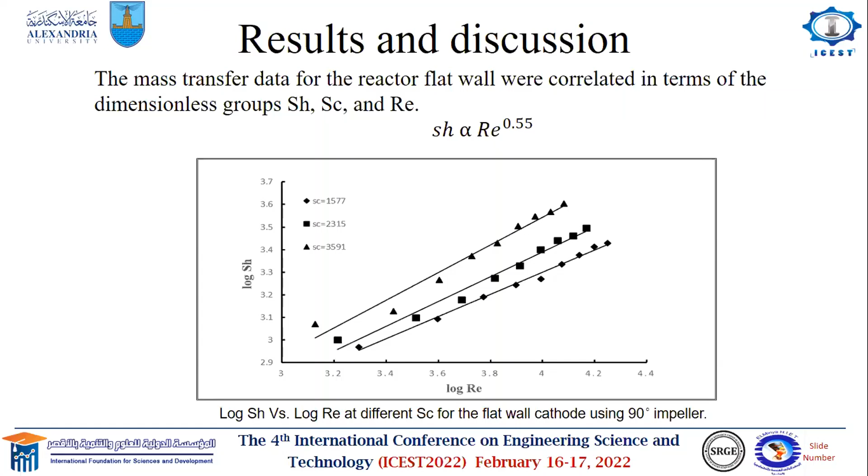For the flat wall, these figures show log Reynolds versus log Sherwood at different values of Schmidt number. As we see, there is a direct relation between log Reynolds and log Sherwood at constant Schmidt. Also at constant Reynolds, there is a direct relation between Schmidt and Sherwood. The data fits the equation Sherwood directly proportional to Reynolds to the power 0.55 for the radial flow impeller. The same trend was found for the axial flow impeller.

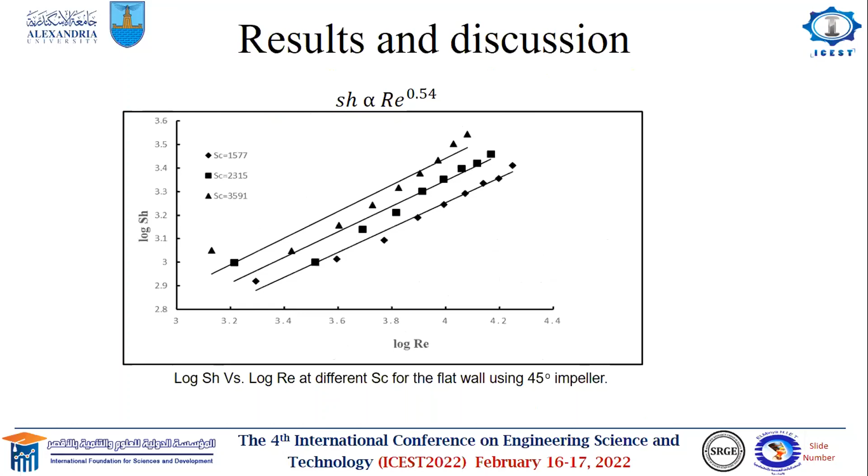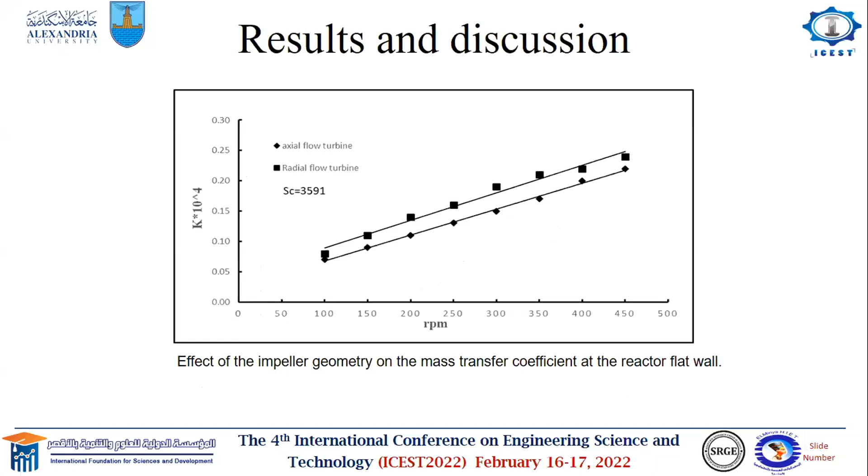Under the operating conditions, an overall mass transfer correlation was obtained from this chart. The same trend was found in the case of the axial flow impeller. For a given set of conditions, it was found that the radial flow impeller gives a higher rate of mass transfer than the axial flow impeller. This is because a jet is produced in the radial flow impeller which hits the surface. This jet has a great effect on the rate of mass and heat transfer.

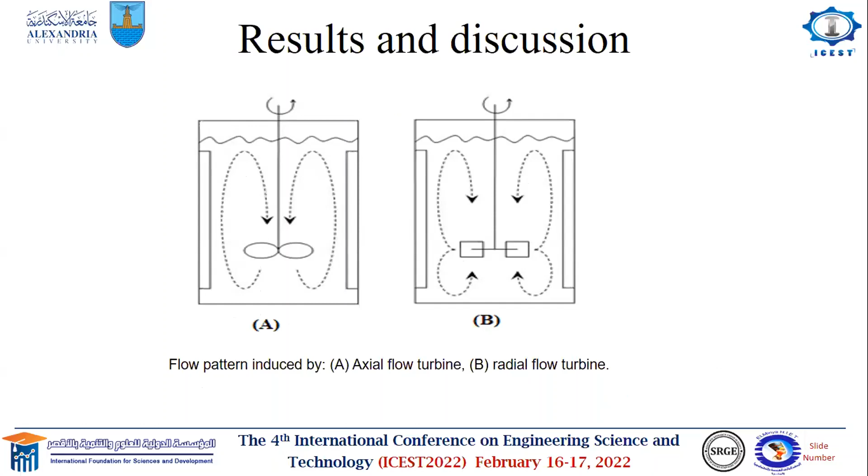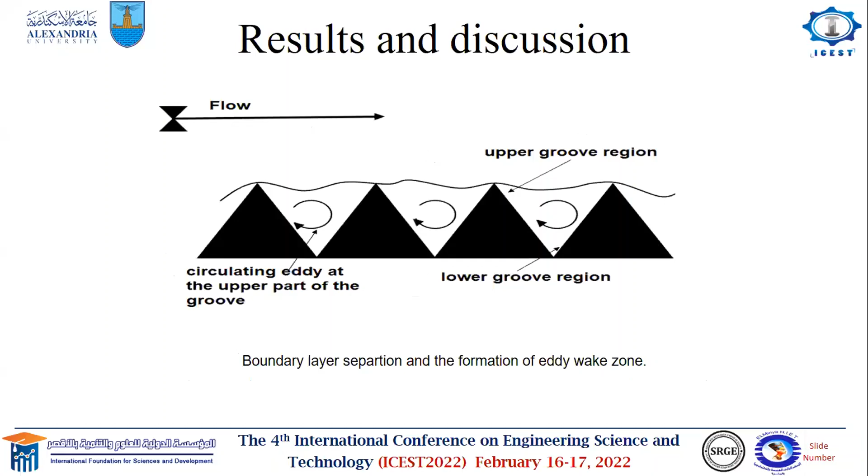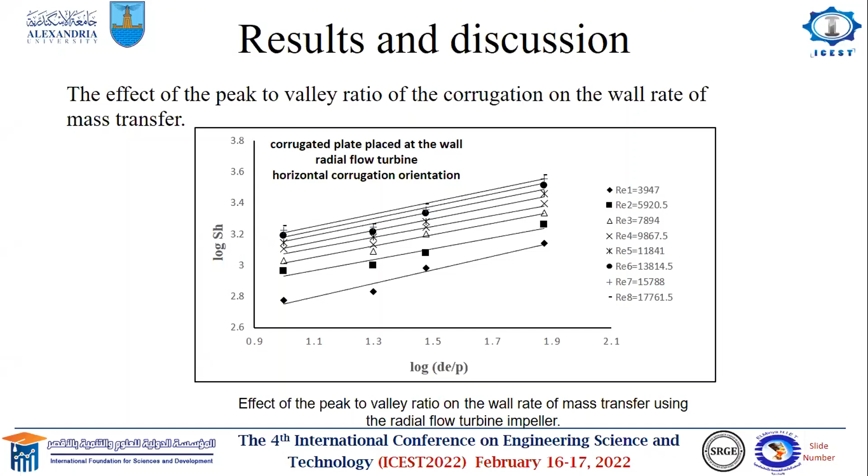This figure shows the effect of the peak-to-valley ratio of the corrugation on the rate of mass transfer. As its value increases, the rate of mass transfer decreases as the circulation eddies don't reach the lower groove region. Under the operating conditions, an overall mass transfer correlation of the stirred tank reactor with a corrugated wall is obtained. Overall heat transfer correlations can also be obtained by analogy between mass and heat transfer.

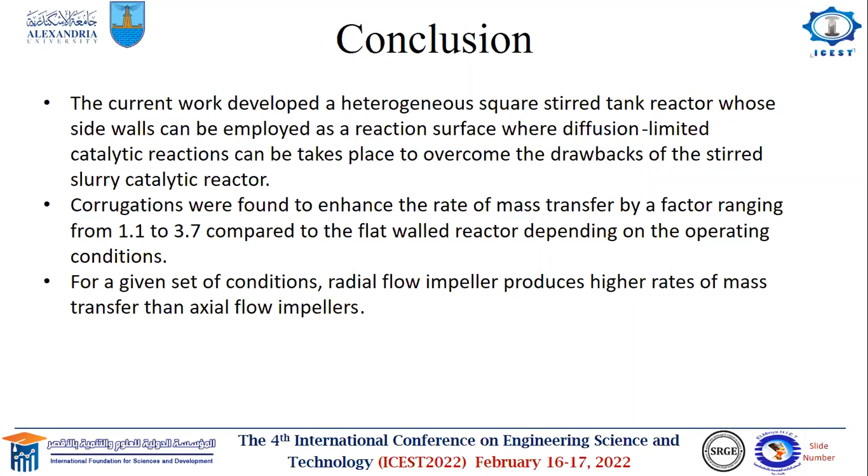Finally, this work developed a heterogeneous stirred reactor whose side wall can be employed as a reaction surface, where diffusion-limited catalytic reactions can take place to overcome the drawbacks of the stirred slurry reactor. Corrugation was found to enhance the rate of mass transfer by a factor ranging from 1.1 to 3.7 compared to the flat wall. For a given set of conditions, the radial flow turbine gives a higher rate of mass transfer than the axial flow turbine.